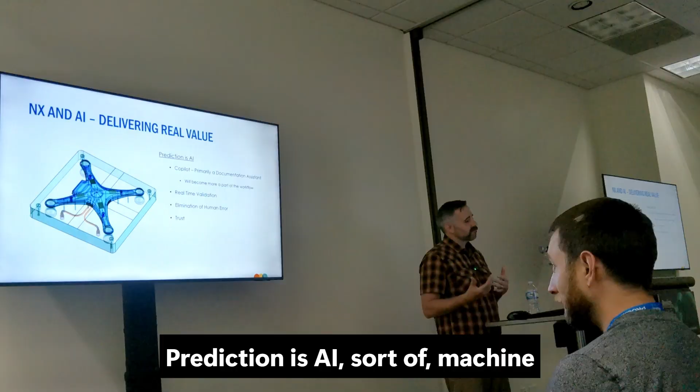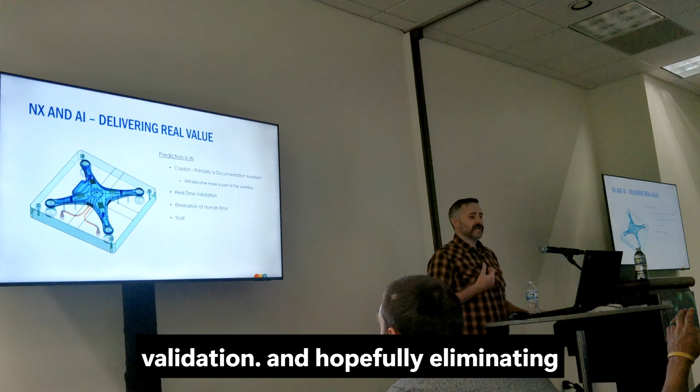Prediction is AI, sort of. It's machine learning mostly, but AI in NX and generally in CAD will become a part of the workflow and add to real-time validation and hopefully eliminate human error. Obviously, trust is a big part of this process, and that is a step that everyone's still working on, trust with AI. And that's going to take some time.

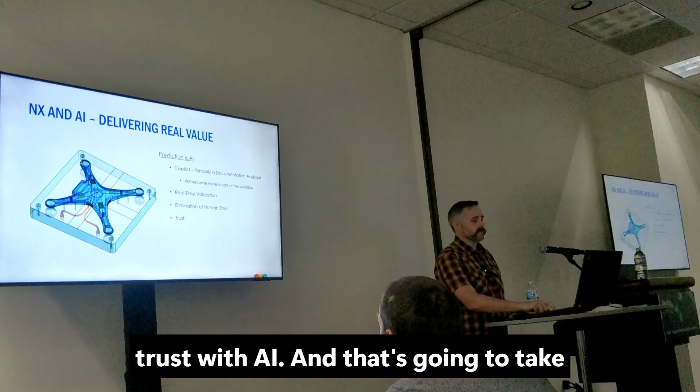Another big thing AI will help with, and is already helping with, is eliminating the tedious design and engineering tasks by integrating those generative tools, using the predictive capabilities, and allowing for intelligent automation. So things we've probably seen in other presentations, where we have the select similar capabilities in NX already, or we have the predict commands capability on that right side of our working window, it just allows us to really quickly get to what we're trying to do, allow NX to select things that we're trying to select, eliminating a lot of that tedious stuff from our workflow.

So why is training still important? I mean, AI can do it now, right? Well, this can mean different things to either the individual being trained compared to the company that wants the training to be delivered. For the individual, we're seeking to improve ourselves in some measurable way.

In this case, I'm adding NX CAD skills to the engineering or design knowledge that I already carry. I want to make myself more valuable to my specific industry, to my company. For the company, it's a way to gain and retain top talent. It also increases job satisfaction, overall morale, and I'm sure the company is hoping productivity.

With NX CAD training, we're acquiring specific skills, allowing for the creation of complex designs and assemblies, and hopefully increasing our knowledge and capabilities in overall engineering and design along the way.

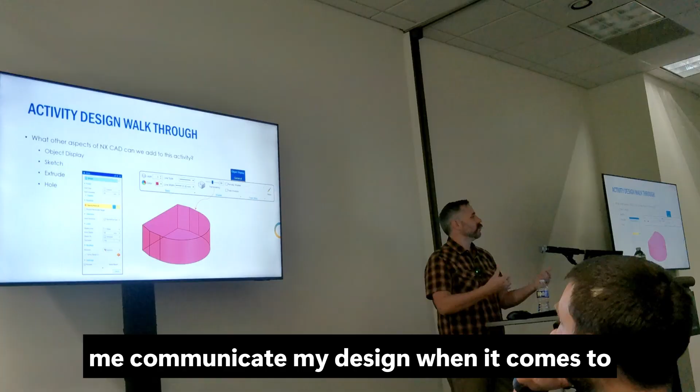One thing I like to add on to an early modeling activity is just to note that we have control over what objects look like. We're going to take a look at edit object display, change the color of an object, or even change the line style. Or do we want to be able to see through the object? All this stuff visually that I'm maybe not thinking of might help me communicate my design when it comes to presentations or being part of an assembly.

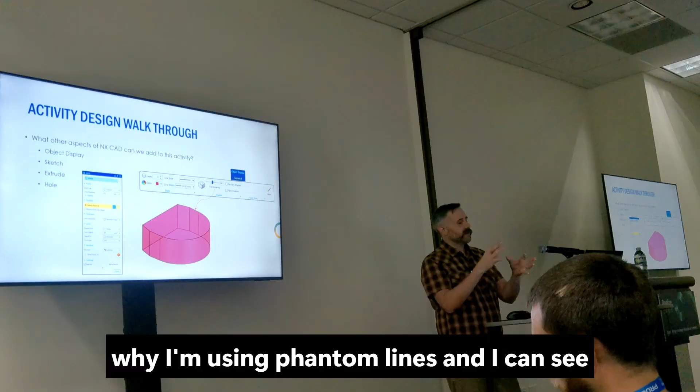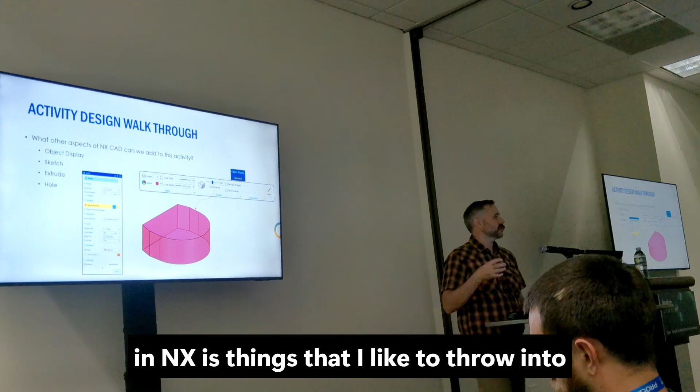You can say this object that I have in here isn't actually here. That's why I'm using phantom lines and I can see through it, but it's there in my CAD model. It might just be a different aspect of the assembly. So being able to communicate that stuff directly in NX is things I like to throw into training activities.

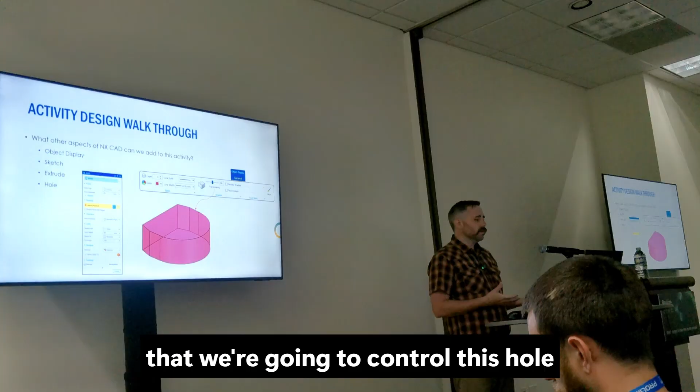The main reason for using datum features is that we're going to control this hole as we add it to the main body of our extrusion. Knowing I want that included in the activity, I'll use PowerPoint to explain that properly and use Copilot to help a little bit.

That's where the trust comes into play, right? Sure, AI can do a bunch of this stuff, but is it right? Knowing if it's right or not is something we're all probably still working on.

This is how some of the slides I put together will look sometimes, especially if I'm trying to create something instructor-led or even video-led. I don't want to put too much information into a single slide, so it'll be almost step-by-step, but not quite.

If the person isn't really paying attention to what I'm saying or demonstrating, they have access to the videos, I might be there in the room for them. They may or may not be able to figure out exactly what to do for the activity, which is part of the training thing. I don't want to scare anyone away with the amount of stuff I'm putting into an activity.

So let's see, I talked about this activity that I've been setting up. It would go something like this as far as the demonstration. Let's see if I can... do I have to back out of this to show it on my screen? Probably.

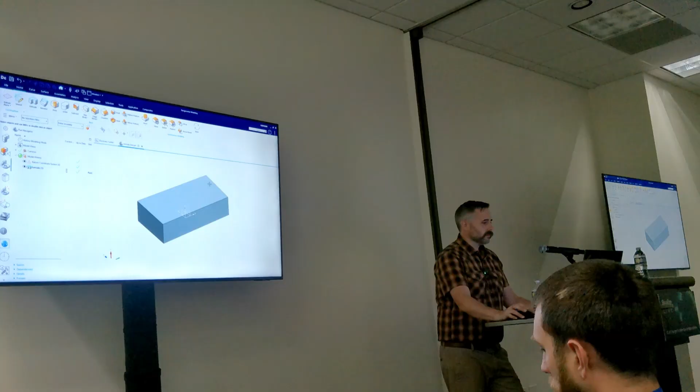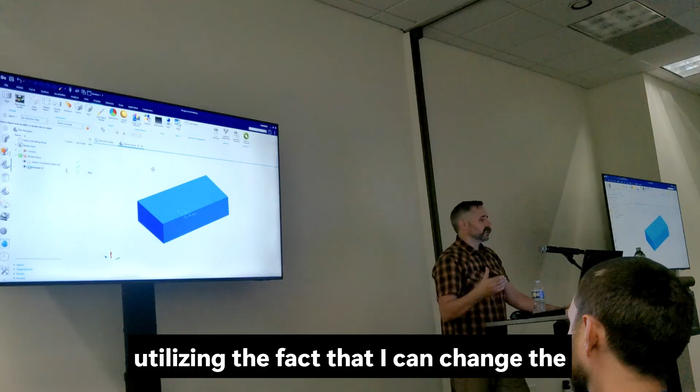So different aspects of what I might show as I'm doing this is we have the display tab up here with the tool called Edit Object Display. When I jump into this, I can change the color to something that I want, say, kind of a blue. And maybe that just helps communicate more of what I'm doing, whatever the aspect of my design is, utilizing the fact that I can change the appearance of the objects I'm creating. So kind of demonstrating that, and then what am I trying to do here?

So I'm using the hole tool. I'll refresh that to reset. And I want to put a hole down on the top of this part. And I want it to go all the way through the part, but I want to have some control over the angle, because I don't quite know what the angle of that hole is yet. And it depends on some stuff that hasn't been figured out. But I want to lay it out so that I have control over that and I can change it when I want to. So I need to have some objects in there to help me do that.

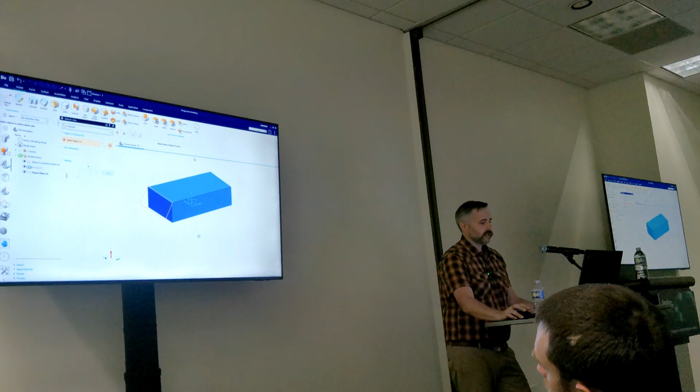And so using those datum features, whether it be a datum plane that I want to set up, let's say an angled plane here, I can just select the edge in the front face, create an angled plane, as well as, let's say, a datum axis that goes through that plane and through here. So I'm just using that inferred selection, knowing that if I pick two objects, it'll try and pick something that is intersecting. Or I picked the face and the edge, knowing that that's going to give me kind of an angular aspect to controlling my datum plane.

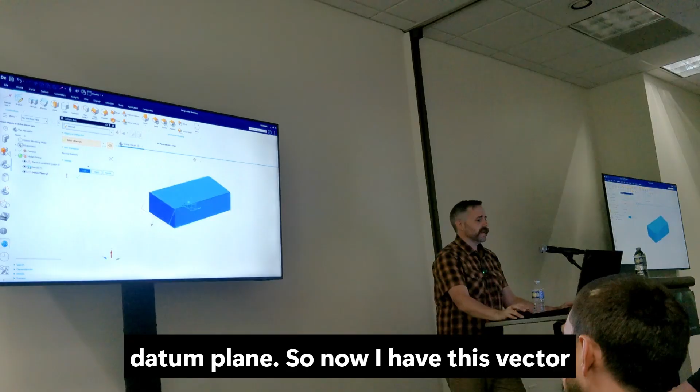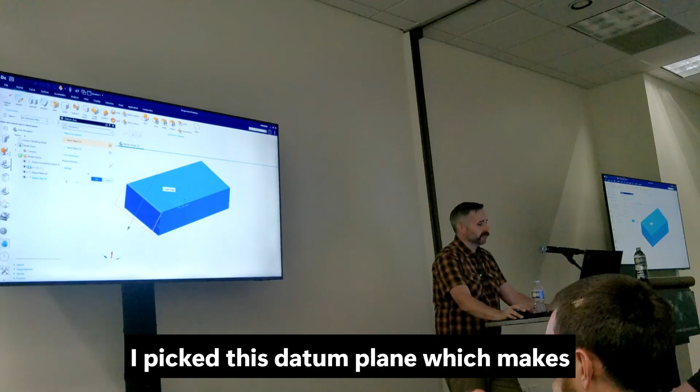So now I have this vector, and the reason I might want a vector is I want a certain direction for my hole to select that direction. And so that's what I have set up here. Another aspect of placing this is, you saw when I used the intersection for creating my datum axis, I picked this datum plane, which makes sense. I'm controlling the angle of this vector with that datum plane, but I also utilized the available datum plane that's in here on the origin, so the XY there.

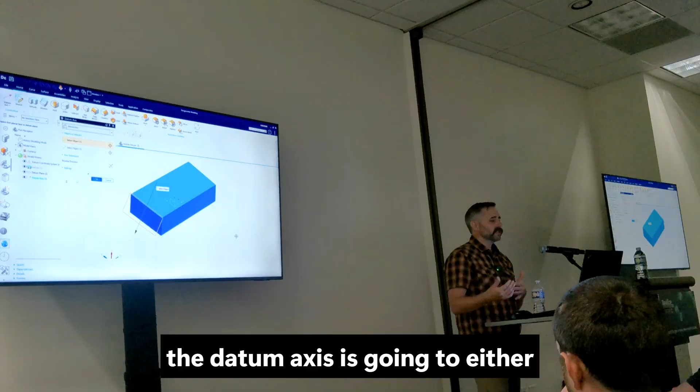And the reason I picked that and not, say, the side of a part, so I could pick the side of this block, I'd end up in the same spot I am now with where that vector is going. However, because it's tied to the side of that block, if I change the shape of the block or something happens to the block, the datum axis is going to either fail or change its axis a little bit, it changes its degree, and it's going to point somewhere else. And I want to make sure I'm controlling what I think I'm controlling. So I'm picking correctly as I'm setting up these features.

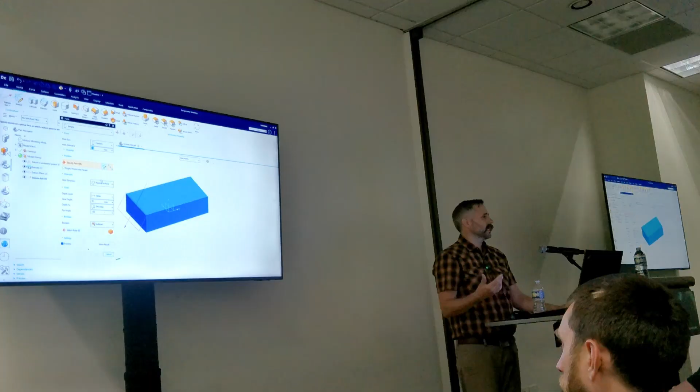So now I have that vector that I want to use to control the hole that goes down into my part. So I can jump back into my hole here. And we're going to see right now under hole direction, I'm just using normal to face. That's the default, and that's most of the time what I'm going to use. And so I'm not going to really notice when it's not normal to the face, because most of the time I'm putting it on a plate and it goes normal to the face.

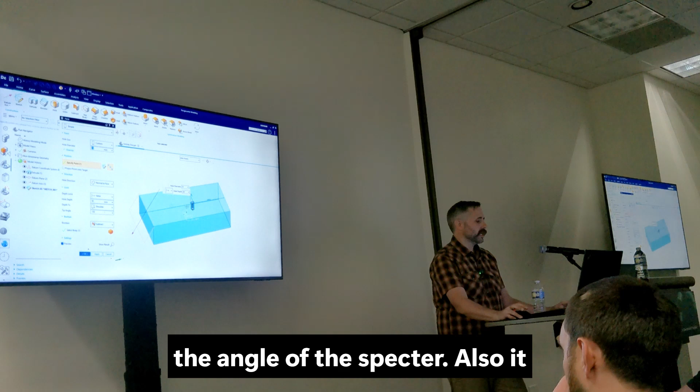But in this case, I don't want it to be normal to the face. I want it to be doing something else. I want it to be maybe right on the center point of that and going down following the angle of this vector. Also, it needs to be a little bit bigger. So in the working window, after I place a hole, I can just do this really quickly. And I want to make sure it goes all the way through the part, but actually, as I change the angle of this, having a depth as a number might not work out for me.

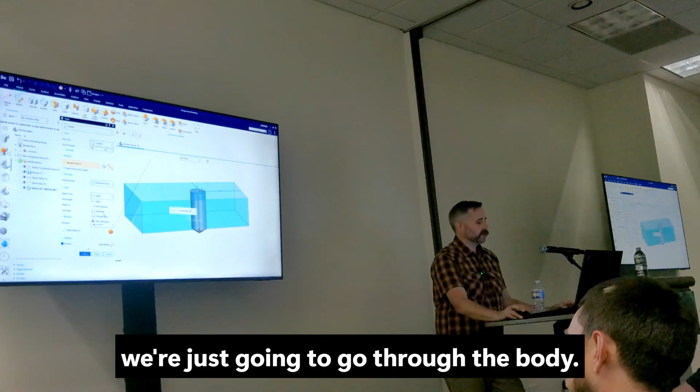So I can take a look at my limit options in the hole and say down here under value, we're just going to go through the body. So no matter what I'm doing to my hole now, it's going all the way through. And what I can do with hole direction is, instead of normal to the face, which is what it currently is set to and defaults to, I can use along vector. So if I use along vector, looks like it's picking a vector for me, but I want to select this vector. And you will notice that I'm able to pick that. It has a nice little preview for me.

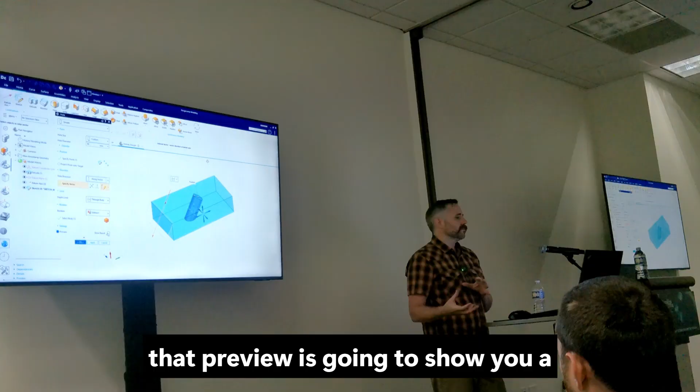Other things as I'm doing activities, especially if it's early on in a foundational class, I'll kind of walk through different aspects of the command window here. So we have preview in most of these tools, but pretty much all of the tools will have show result. And the difference there is that preview is going to show you a sometimes faceted version of what is going to happen, whereas show result will basically do a dry run through the calculations of actually creating that geometry. And so I've had situations where I'm adding blends and it looks like it's going to work according to my preview, and then you hit OK and something fails, where show result will show you that failure state without you having to close out of the dialog and get back in. So utilizing the dialog properly can help save time as well.

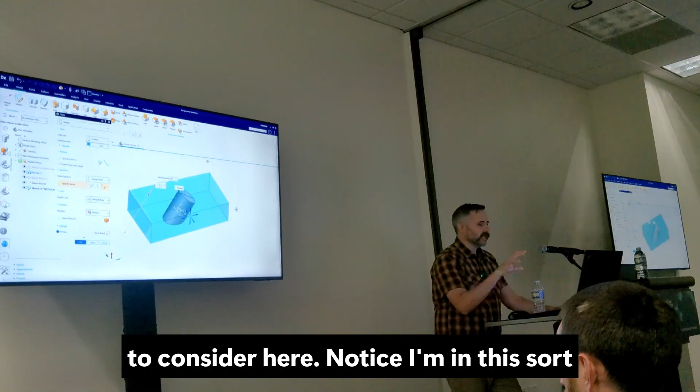But now I have this hole going down through my part. Maybe I want it to be even a little bit bigger. And there's a couple other aspects I want to consider here. Notice I'm in this sort of in-between world using the hole tool. Some of the other tools will be similar to this, where I'm not really in the sketch environment, but I'm not quite in the modeling environment either. I'm sort of in this in-between area where I'm setting up things that are in the sketch area.

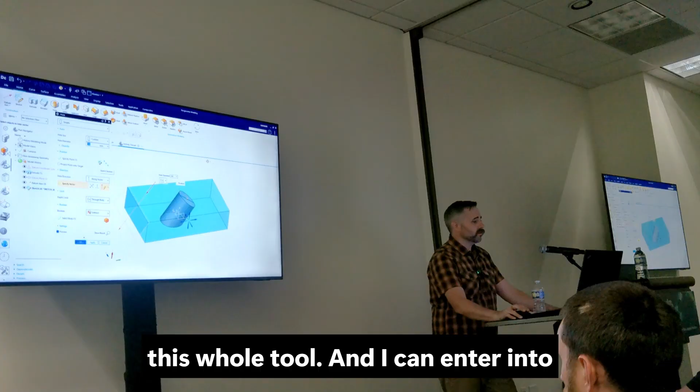There is, under the position here for the hole tool, specifying a point, which creates a sketch object of a point within a sketch. And so there's going to be an embedded sketch as part of this hole tool, and I can enter into that and place this sketch. So one of the things with the new sketcher is that we're looking at mechanism mode. And mechanism mode allows me to create curve objects using definition similar to what I might be doing in the old NX environment.

And so it's not looking for those found relations in the background right now. It's just if there's a relation that I've added to something, it creates it as a persistent one that sticks there in the session. If I take this off, I now have access to relaxing relations and dimensions. If I relax dimensions, let's see if this works with my P values here, but I want to take that point and put it there and make it so. And so if I'm relaxing it, I don't have to delete my dimensions and put them there.

With these being P values, we're now looking at an over-constrained area, but I can use my sketch navigator to go take a look at what's going on there. It'll tell me, okay, there's some conflicting stuff here. We have the value plus the position that it's locked. And so maybe I change how these dimensions are being applied to avoid that. Maybe these are reference now. However I want to set that up.

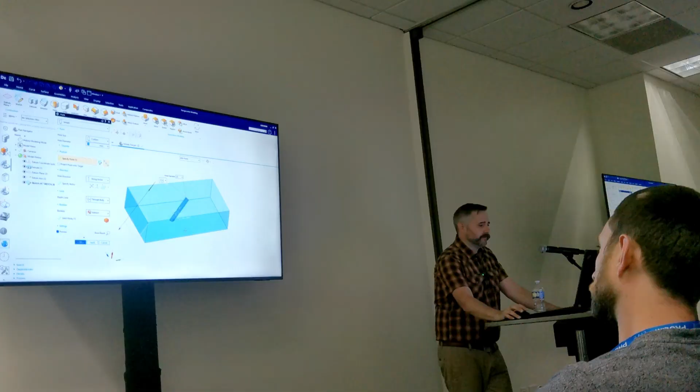So I wanted to put the hole point placement on the center. Click Finish. It moves it there for me. And it looks like I changed some of the aspects here of my design.

Another thing I want to mention with this is, because most of the time we're adding holes as normal to a face, we're not really thinking about how this is being cut into the part. Under settings on the hole tool, there is an extend start. And if I show the result here, it's clearly cutting all the way through, as a hole should.

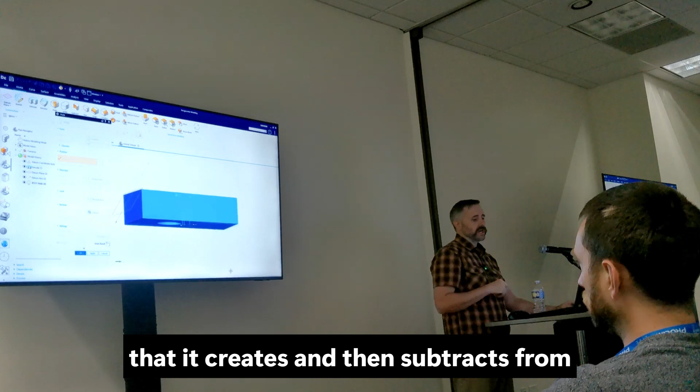If I don't have extend start on, and I show the result, it's literally just giving me that subtraction solid that it creates and then subtracts from the part. And so it's cutting kind of halfway in that. And like I said, we don't necessarily see that all the time or think about it all the time, because we're usually adding things that are normal to the face. And so I can undo that show result and say, no, I do want extend start there.

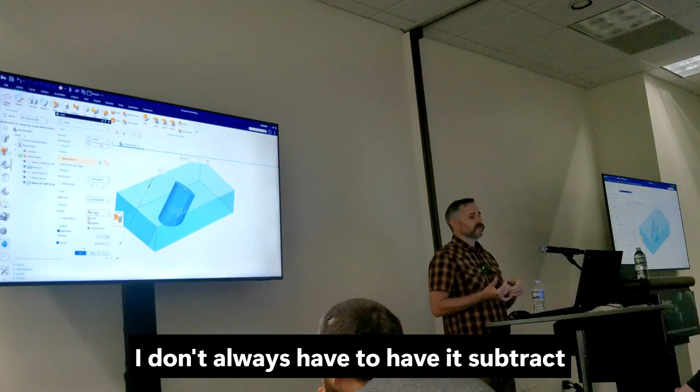Another thing I'll mention about the hole tool itself as we're doing activities like this is that I don't always have to have it subtract immediately from the thing I'm putting the hole on. I can create a hole subtraction solid, do some stuff to that subtraction solid, and then subtract it later, giving me a lot of flexibility in how my holes look.

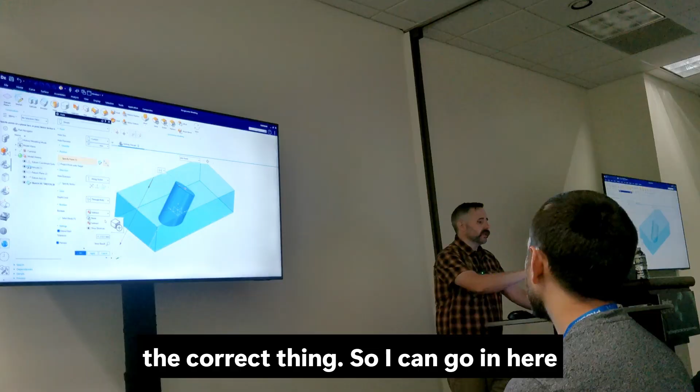Maybe there's something I need to add to this hole that this hole tool just isn't quite giving me. So I can go in here and add the groove I need or whatever it is, and adding it to a cylinder is easier than adding it to the inside of a hole, if that's the case. So for example, if I have this set to none and I show result, it's just giving me a hole solid that I can subtract later. In this case, though, I am subtracting this from the part.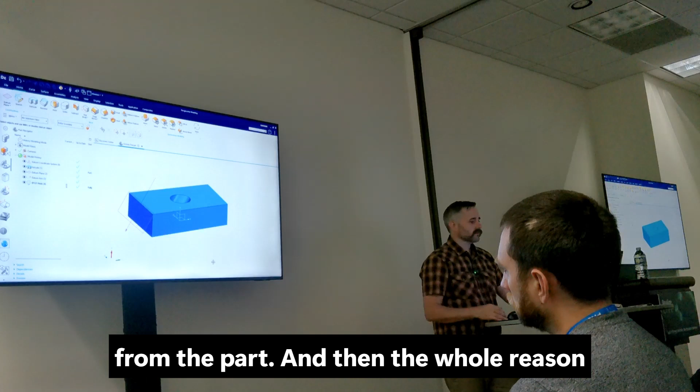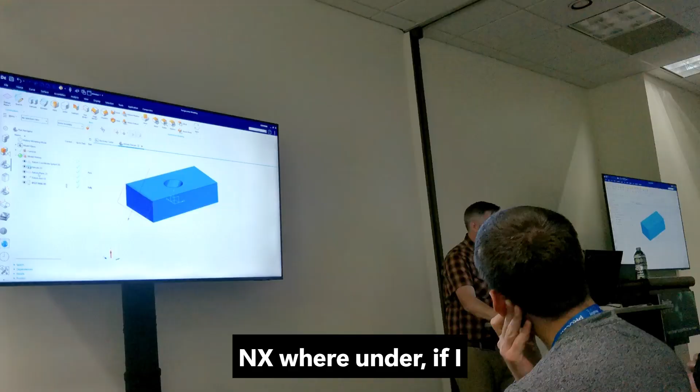And the whole reason we were doing this activity is that we just used these datum planes to help control a hole after learning how to create datum planes. And so now I can use a really quick aspect of how parameters work in NX, where if I highlight the datum plane on my part navigator, my feature tree, and I go to details, it'll show me the expression or the P value here. And it'll say, okay, the value of this is 33 degrees right now.

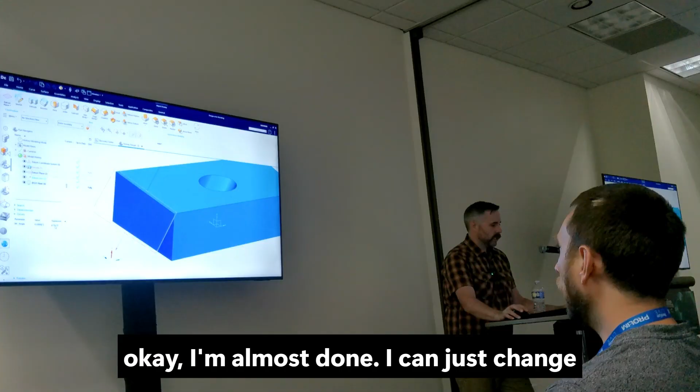So I can kind of zoom in here and, oh, I forgot to plug my computer in, but that's okay, I'm almost done. I can just change this really quickly and say, oh, that's supposed to be 45. And so I can change it, and it updates right there in real time. I don't have to worry about going into my datum plane, changing the value here, not seeing what the immediate change is, clicking OK, waiting for stuff to update. I can just go to my value that I want to change and say, okay, that needed to be more like that.

And so now we're using that capability within NX, those P values, the expressions that exist as I'm creating features, and utilizing that to help control things as I create them.